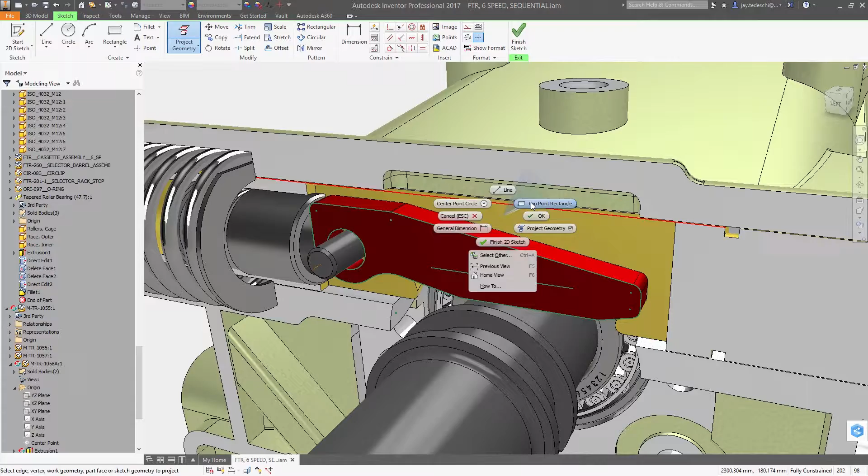With Autodesk Inventor 2017, core design tools for part and assembly modeling, surfacing, sheet metal, and drawings include several enhancements that make it faster and easier to design and document your product.

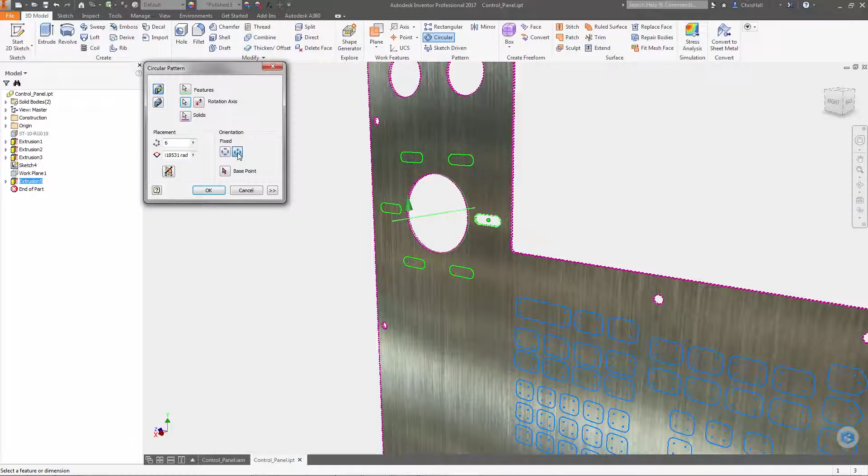In the part modeling environment, you can now window cross-select multiple closed profiles at once when using the extrude command. And there are several enhancements to patterning. Circular patterns have an option to fix the orientation of the feature as it rotates around the axis. A new sketch-driven pattern tool lets you pattern features to points created in a 2D or a 3D sketch. And patterning and mirroring operations can now be applied to multiple bodies at once.

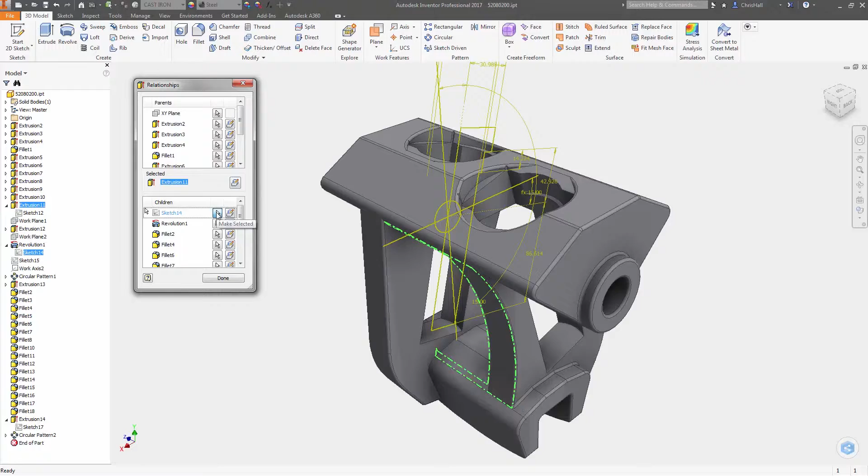There's also a new Parent-Child Relationships browser that can be accessed by right-clicking on the feature in the window or in the model browser so you can see the upstream and downstream dependencies for each feature.

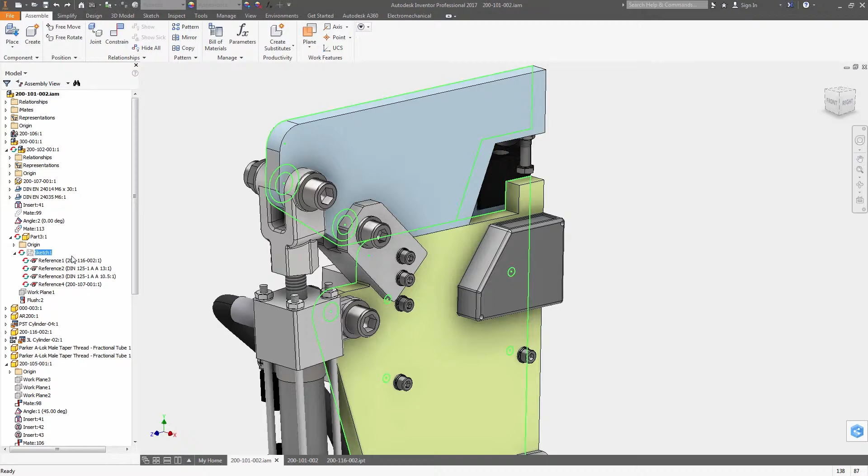When designing assemblies, you can now make components transparent by right-clicking on the object and selecting Transparent from the pop-up menu. And cross-part references are easier to identify, with component names displaying next to the reference feature in the model browser, along with icons that illustrate the type of reference. There's also options to break the reference, open the assembly file the reference was created in, or to open the reference part directly.

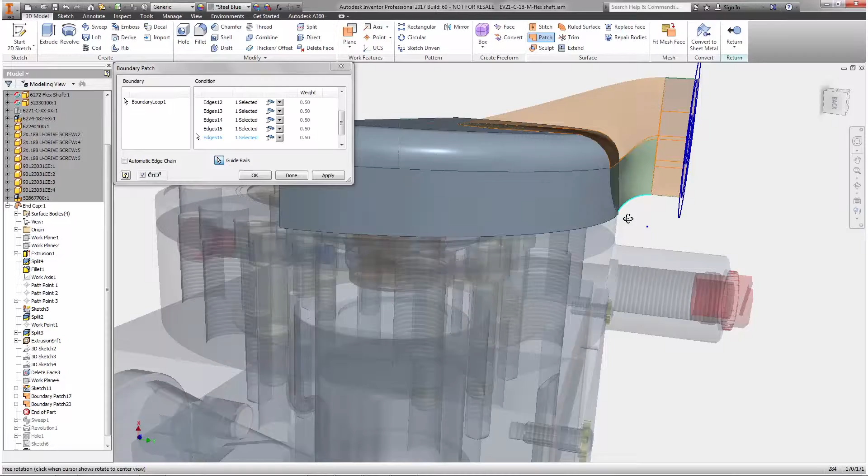We've also made enhancements that give you more control over the creation of surfaces. You can now select guide rails when using the boundary patch command to select curves or points that guide the shape of the patch. And an angle option has been added for all types of ruled surfaces.

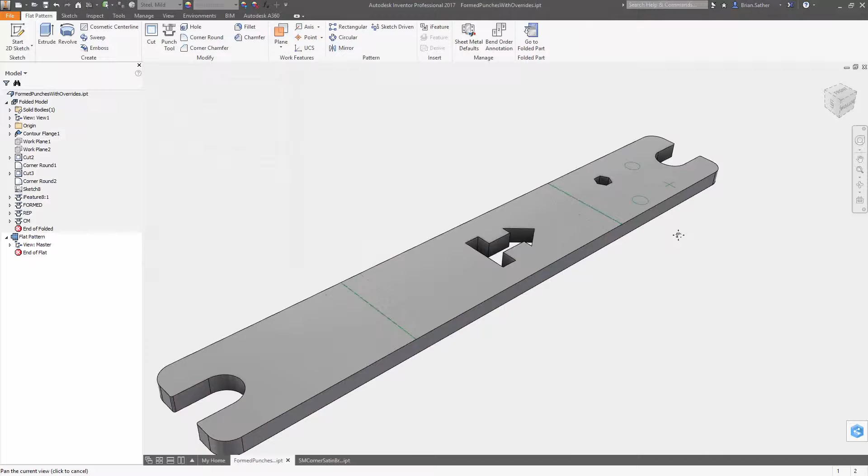Inside the sheet metal environment, there are 3 new corner relief options to give you more control over the placement. You can now also control the visibility of punch representations on the model, so the punch can be shown, or a sketch representation or a center mark can be used. And there's now an option to defer flat pattern updates.

Drawings have also been enhanced with a new option to use a jagged line to display cut edges for partially sectioned components in a section or detail view. Column and table header rows now support text wrapping, and parts can be opened directly from parts lists in the drawing.

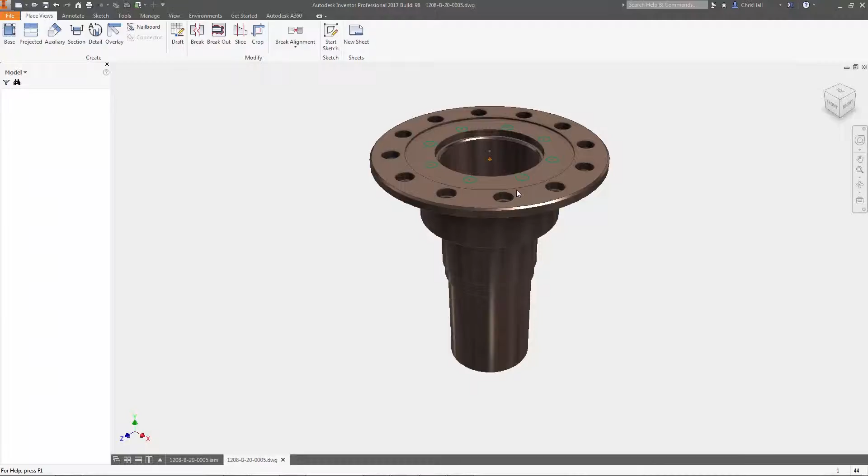From part and assembly modeling to surfacing, sheet metal, drawings, and more, the core modeling tools inside Inventor 2017 are better than ever and help you quickly create your product designs and documentation.